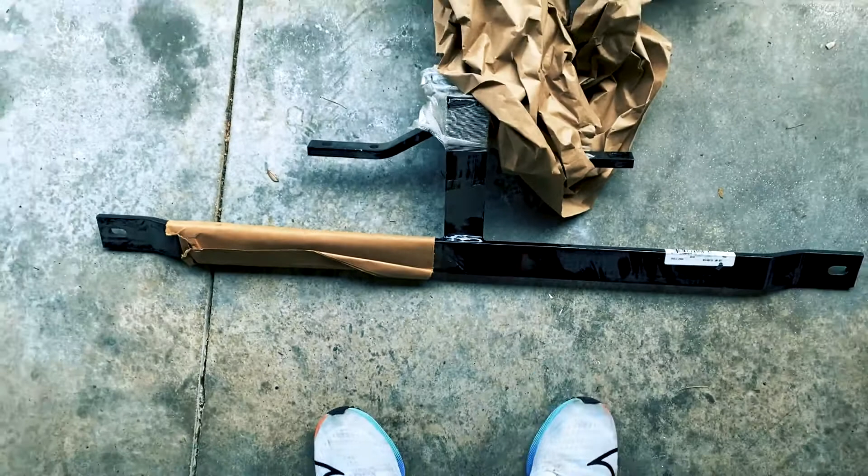I've got the trailer hitch box open, and I'm just pulling this out for the first time. Here's our E-Trailer.com box, and first piece I see looks pretty simple. It's a little dirty, so I may wipe it down before I put it on. Not that it's really gonna matter, it'll be under the car. So what I'm gonna do is just see if I can cut off this cardboard and plastic that's on there.

Is there anything else in this box? I was hoping maybe some instructions. No instructions. Well, we're gonna figure it out.

So this little bundle on the end was not just to protect it, it's also holding all the hardware that's gonna go on there as well. And so that's good news. Got all the bolts and everything, washers, I can see them in there. All right, in this little bundle.

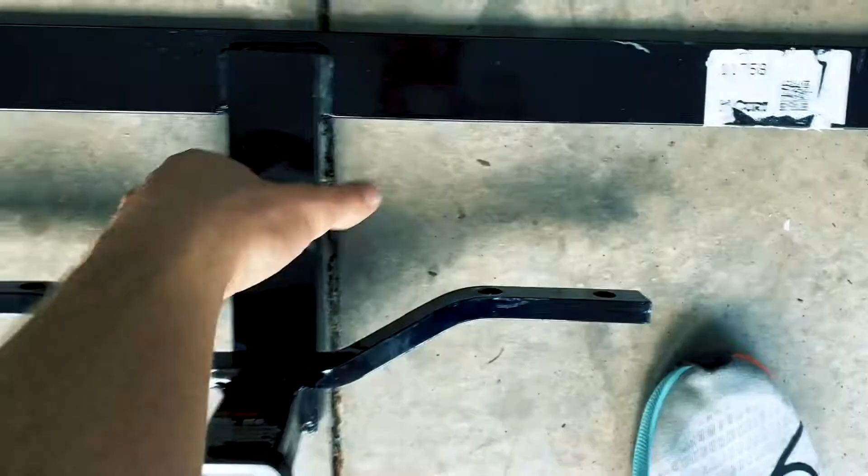I've got our hitch wiped down just to get some of the dust off of it. You can see it's like Curt. I'm not sure who they are, but these are the capacities of it. Now all I'm holding at any given point on this thing is gonna be 2 mountain bikes, so I really didn't need much in terms of capacity, just enough to hold a bike rack and 2 bikes.

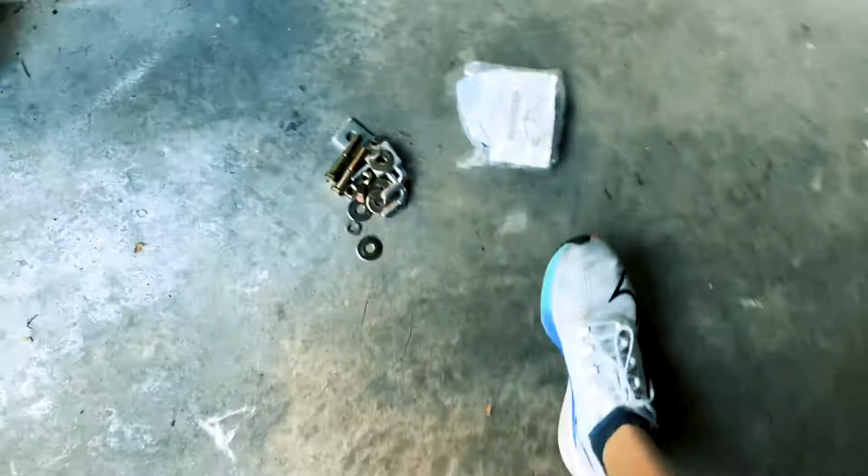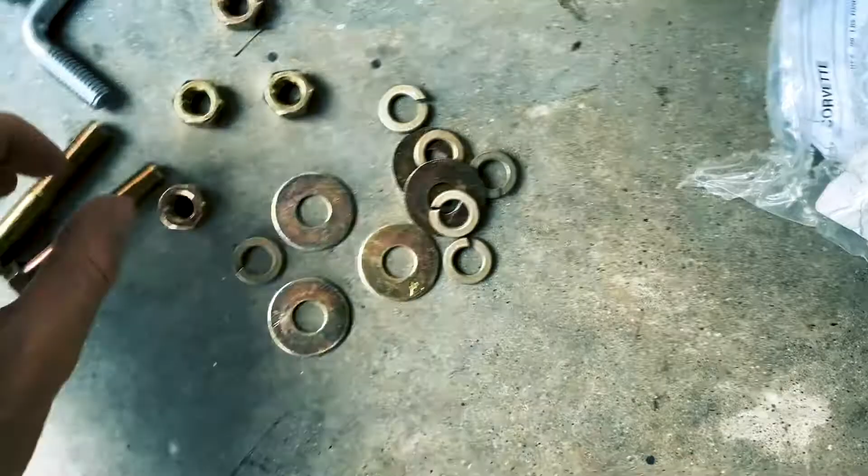When I open that little bundle up, here are all the parts I got. I've got a couple of big squares, or spacers or washers. It's like some kind of U-bolts, 2 big bolts, and various other washers and lock washers, as well as, ooh, it's like a little set of instructions. Awesome. So I'm gonna take a look at those and see how this install is supposed to go.

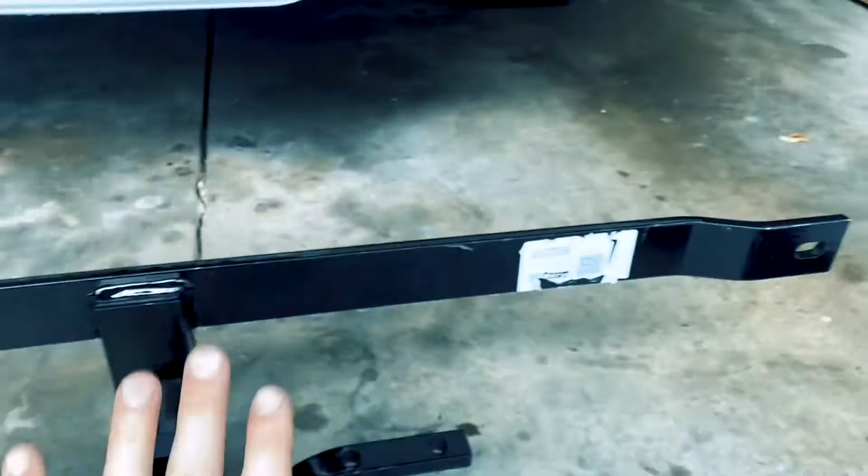So here's how this thing's actually gonna sit on the car, right? It'll be upright. These 2 at the ends holes are gonna mount underneath the car to hold it in place, and then I'm actually gonna have to come up from underneath in these 4 positions and drill using this as a template into the frame of the car to make holes that'll actually bolt it more securely to the car.

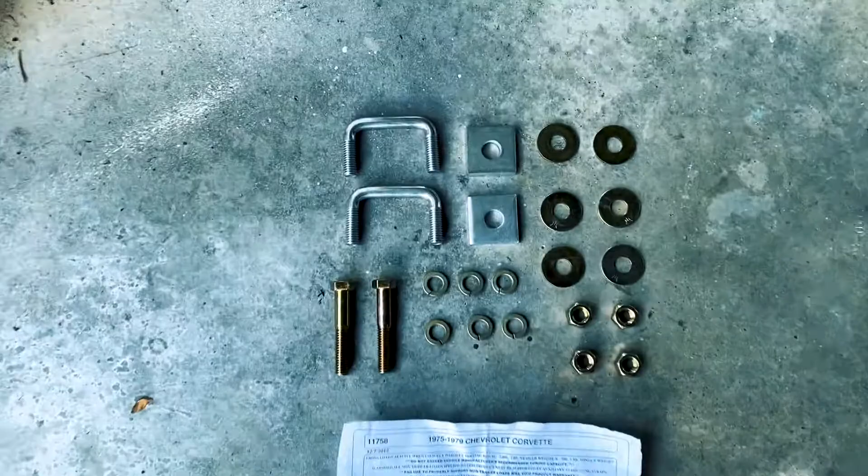So here's what we've got between our instructions and our materials. We've got these 2 U-bolts, as well as these 2 other bolts. These are the ones that are gonna go at the end to hold it in place while I'm working on it. These are just our flat spacers, regular washers, lock washers, and these 4 nuts.

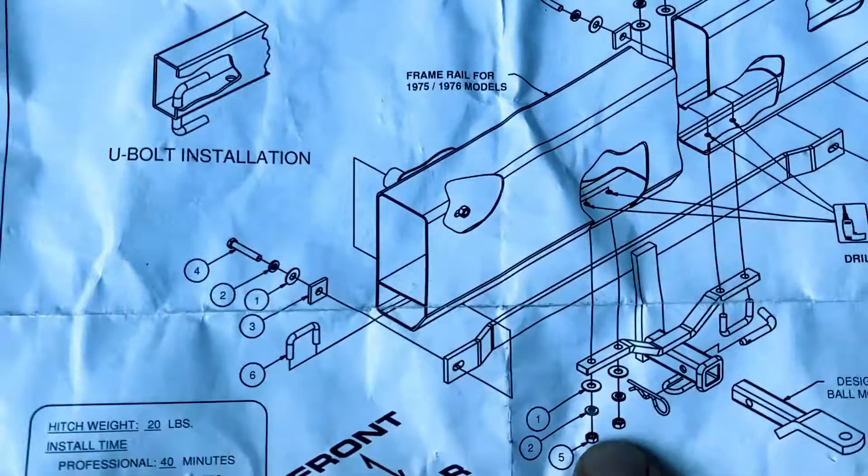So here's what the installation guide says. It's got this little picture, and you can see it's sitting upright. It's actually this whole unit sitting upright, just like I had it on the ground. And this first step says remove the 2 lower inside bolts of the bumper. I haven't seen where those are yet. I haven't actually gotten under the car today.

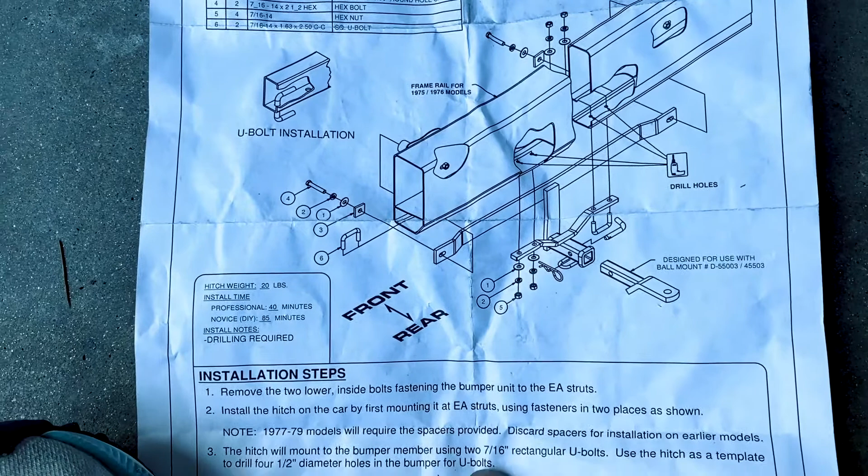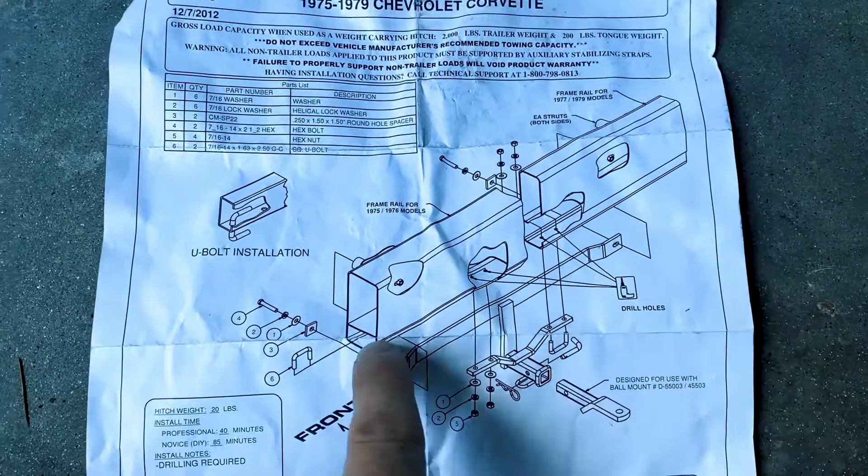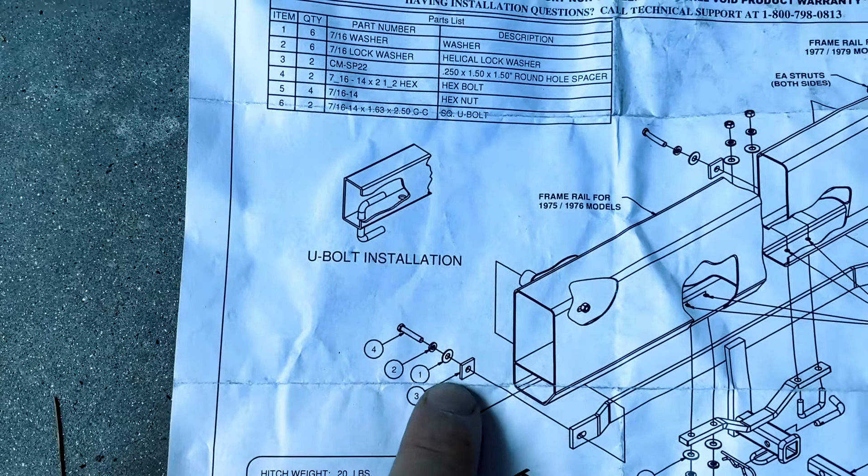Install the hitch in the car by first mounting at EA struts, using the fasteners in 2 places shown. So I think what they're talking about here is that this side and this side, I'm gonna basically hold up and in combination send one of these bolts right there with a lock washer, then a regular washer, then one of those spacers, and I guess use that somehow to mount it using this U-bolt. I'm not really sure what I'm doing here yet. I'm gonna have to figure it out a little bit.

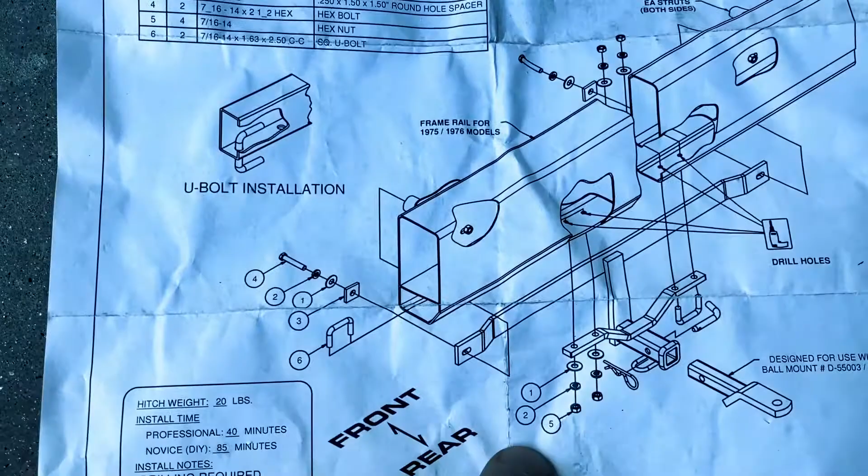There's a note down here that says for 75 and 76 models will require blind installation of U-bolts, see diagram.

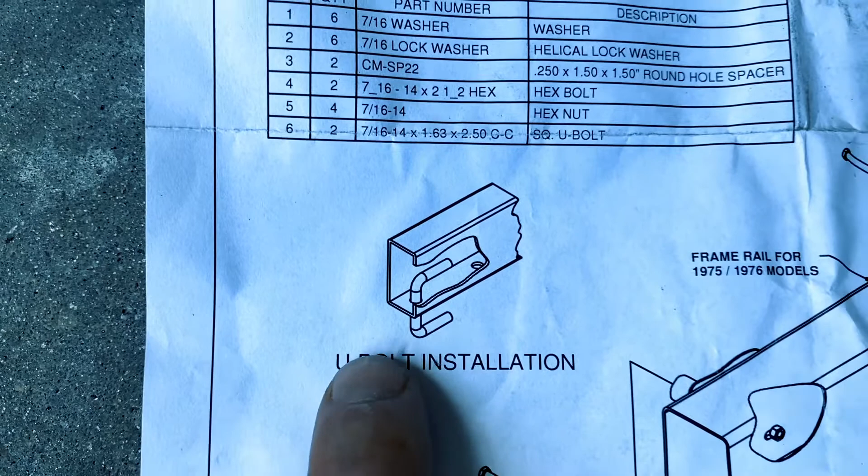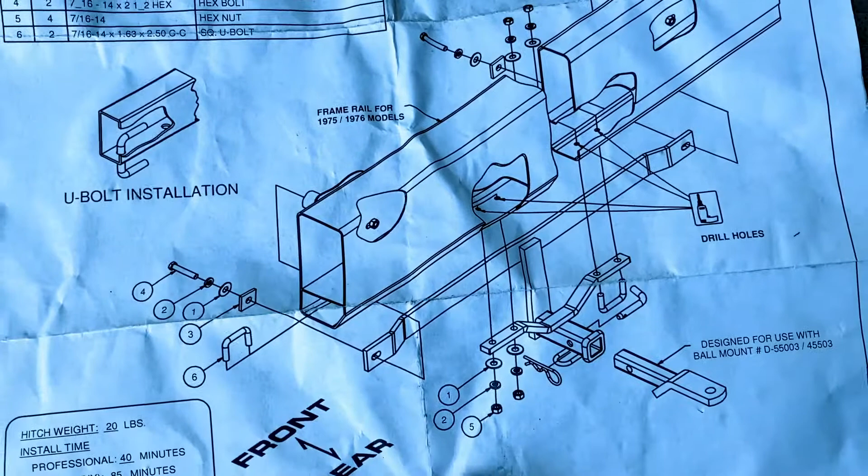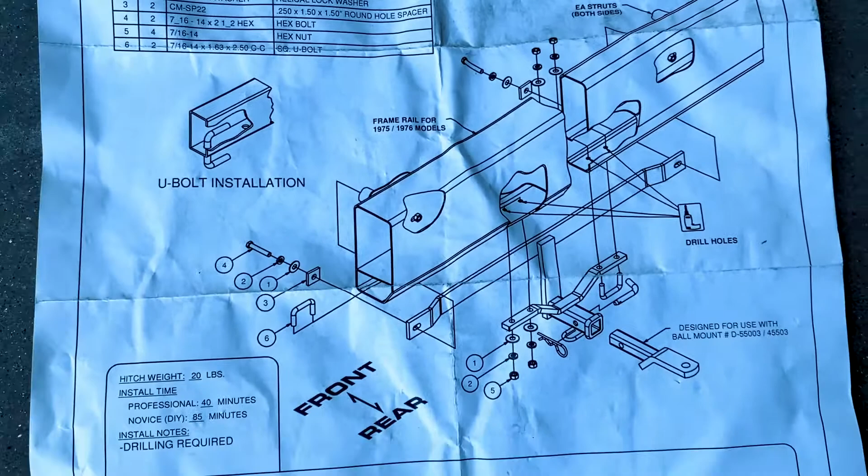So here's this diagram, and that applies to me since this is a 76. I guess I'm gonna feed it through and try to do it by feel while it's inside the frame. And then here's where I'll actually be drilling holes, using this thing while it's held in place as a template - these 2 holes, 2 on each side. Then using this combination of fasteners provided, I guess I'm gonna be bolting it in.

Not totally as straightforward as I thought, and I wasn't aware I was gonna have to drill in, but luckily I've got a drill and a 1/2-inch drill bit that I think should do the job, and some safety goggles since I'll be laying underneath metal that I'm drilling into.

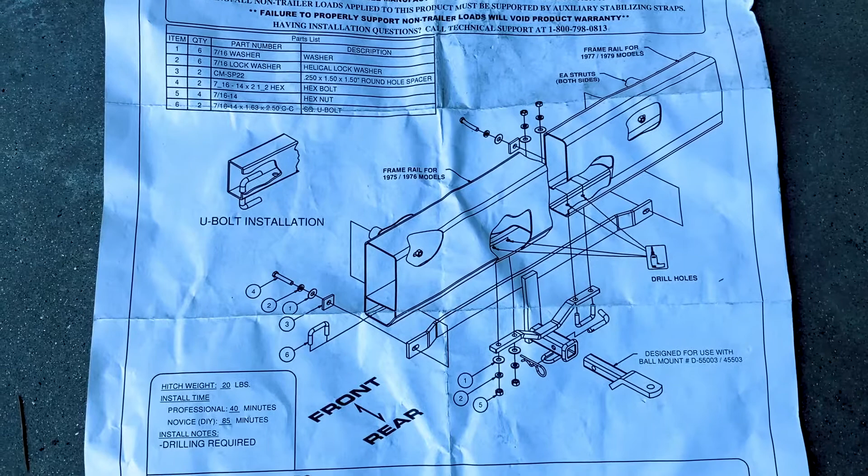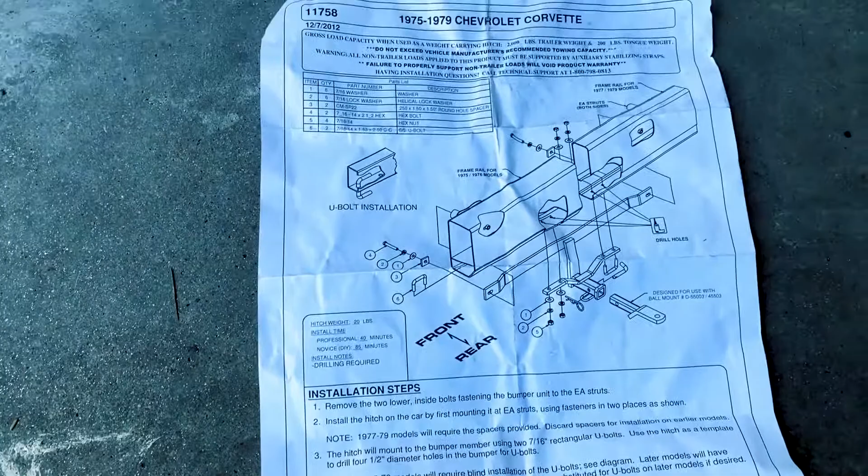So I'm gonna get myself under the car and see what everything looks like down there, see if I can make a little more sense of this. That's it for instructions - just those 4 steps in that 1 diagram. So we'll see how this goes.

Time to get under the car. So what I've done is chocked off the front wheels to be safe. Of course, the car's in park, the e-brake is on. I've also opened up both doors just so that they're not latched, and pulled the hood latch to release that as well. It's just something I've read - when you're lifting the C3s, you're supposed to have the doors and hood unlatched. I think it gives it a little room to flex.

Under the load, not totally sure why, but it sounds like it's a little safer that way. So what I'm gonna do now is, now the wheels are chocked and the car's parked, throw my floor jack underneath it, find a good spot on the frame in the rear, lift up the rear, throw some jack stands under it, give it a good shake to make sure it's safe, and then get myself underneath to look at where this trailer hitch is actually gonna go.

Let's get after it. Look at this monster truck looking Corvette way up in the air. That's so funny, but I went ahead and got it jacked up.

So I've got a 4-ton jack stand on each side, sitting here holding it. We've got the wheels chocked in the front - may as well kick those in, make sure they're right where I want them. And what I'm gonna do now is give it a good hard shove, because if it can't take that...

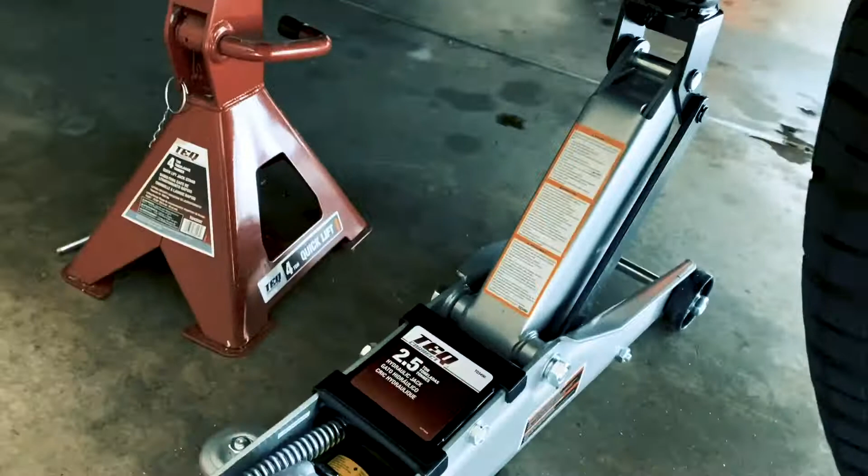...without budging, good - I don't want to be underneath it. So it feels real solid. I've got a jack stand on this side, and also, just for double safety, I put the jack itself just barely touching. The jack's not the thing supporting the weight - I would never go under a car that's only supported by a jack, because those do give out. But the jack stand, I trust. The jack's there just for a little bit of insurance.

That was more of a process than it probably should have been, but I was able to remove the first 2 bolts I need to take out. It's kind of funny seeing how tapered the ends are. I found on eTrailer's website they had a video of this whole installation process, which is amazing. I feel like I have an approach now and know what I need to do.

So what I did is I got under, and basically next to this tailpipe underneath here - there it is - where you're seeing that 1 bolt, there were 2. So I removed the lower of each. What I'm gonna do is basically slide that top wide part in above the exhaust on each side. You sort of have to go up one way, then up the other, then let it rest down, and it should hold itself more or less into place, which is gonna allow me to drive these in.

With a stack of hardware - basically I'm gonna go the locking washer on first, followed by flat washer, followed by a spacer. This is the new hardware that's gonna replace this rusty old bolt that I took out before. These actually weren't that rusted other than the exposed ends.

This is gonna bolt into that same spot in the chassis and hold that thing up in place. Once it's held in place, I'm actually gonna take my jack and press it just slightly up to where I can use those vertical holes as a template to drill my holes. This looks like it's gonna be more straightforward than I thought.

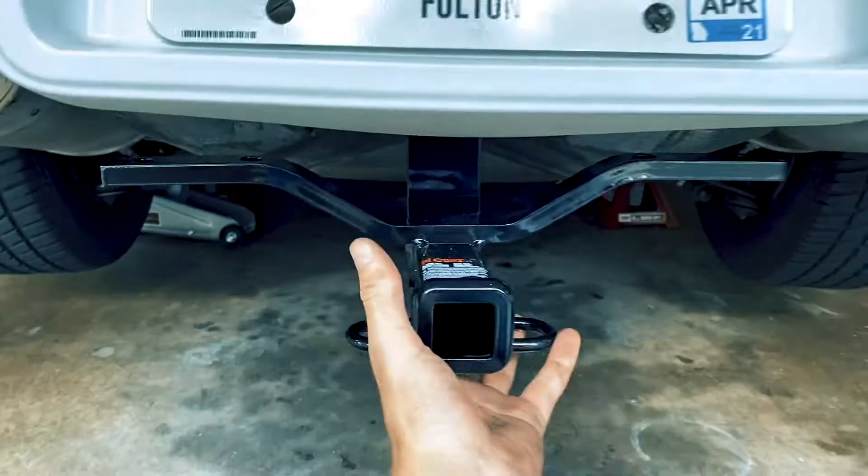I was getting a little intimidated at first, but that video was so helpful. So here we go. I slid this up underneath, and it's basically hanging on these 2 tailpipes underneath there, but you can see about where it's gonna go.

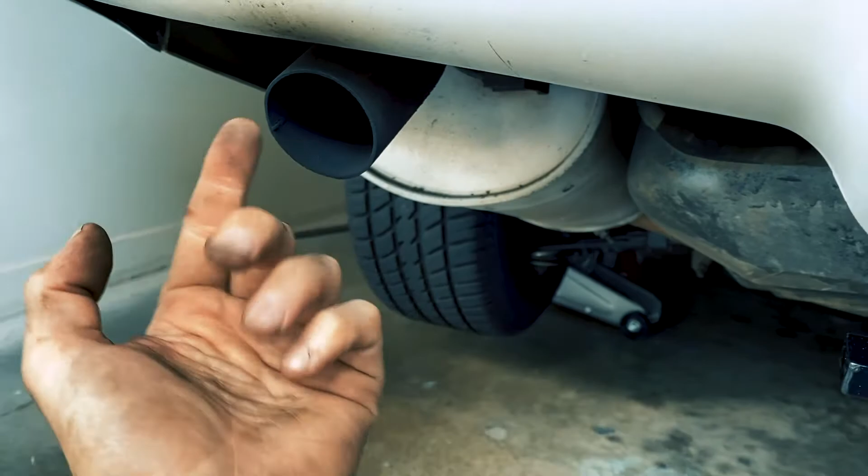This will press up until it's flush with the frame, but this is where the tongue receiver will stick out. It's so nice that this holds itself into place on one side while I'm doing the other, because I've done a trailer hitch install before where with one person it was an absolute nightmare. So I'll get under there, put the new hardware in where the old bolt was on this side first, then swing over here, put the other hardware in, and once they're both installed, I'll tighten it down to spec.

This thing is feeling solid, and both those bolts went in fairly easily. What I did is just finger tightened one a little bit, finger tightened the other a little bit till they're balanced, and got them both as far in as I could, just going finger tight before I put the wrench in, because I wanted to keep it even. I didn't want to fasten one down and have it cockeyed.

I went ahead and torqued it down, and already you can see it's pretty hidden away. I love that it was designed just for this car. It feels fairly solid, but I've got a lot more hardware sitting around, which means I'm not done yet. So I'm gonna continue the install process.

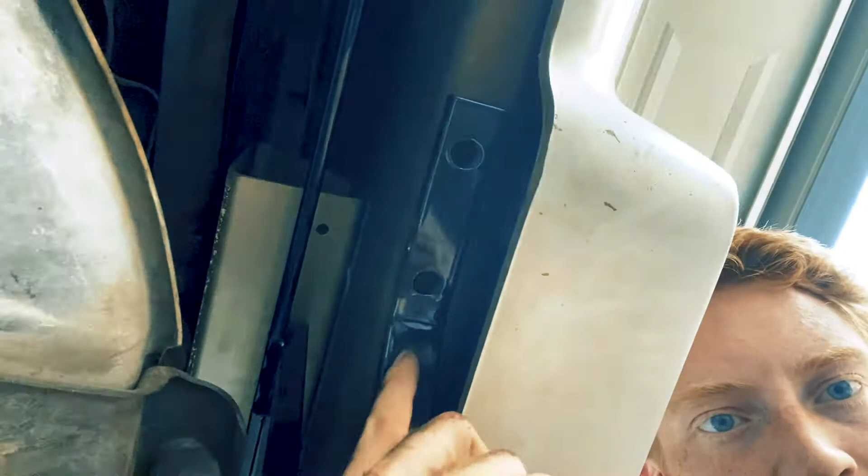Now onto the part where underneath here there's actually 2 holes on each side, so 4 total, and they're already lined up pretty well with the frame. I'm gonna use my floor jack to just hold this up in place. Not that it feels like it has any give, but we'll try it. Then drill a hole, a slightly undersized hole, punch a hole in each of those, and then somehow I'm gonna have to get a U-bolt in there and line it up.

That's that blind U-bolt installation step that they mentioned. Hopefully that goes smooth. I imagine that's gonna be a little bit of a hassle, but this is going well so far.

It is an embarrassing number of hours later, but this thing is completely finished. It seemed pretty straightforward in terms of drill those 2 holes, drop the U-bolts in. First 2 holes with the new hardware replacement, one over by this tailpipe, one over by this tailpipe. That one's super easy.

That was really nice the way that the trailer hitch receiver sort of held itself into place while I was working. That was great. It mounted right up to where I could use the pre-drilled holes as sort of a guide for where to drill my 2 holes into the frame of the car.

So I drilled my first 2, and then this is where the issues started. Basically I drilled my first 2 holes and then noticed another little note in the instructions I had missed on my first couple of reads. That was to ignore these little spacers if you had a 76, or earlier than the 77 Vette.

This is a 76, so of course I didn't need these. I had the spacer in place when I drilled the holes, which meant my holes were going to be off to the side by the thickness of this spacer. That part ended up not being a huge deal. I just pulled all the hardware out on one side at a time, removed the spacer, put it back in, and my holes still pretty much lined up. They were a little bit oversized anyway, so that was totally fine.

But everything has been torqued down and it feels really solid. I mean, I can yank on this thing, it's not going anywhere. It feels like it's part of the frame of the car at this point, which is awesome.

So I'm gonna take it off jacks and take a much needed shower, but that was a lot of fun. All that work, totally worth it.

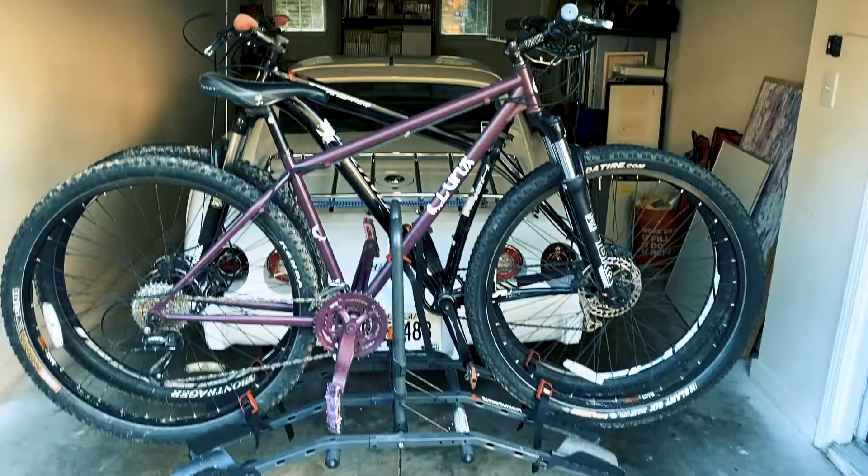We got both mountain bikes loaded up on this thing. Hilarious to see a classic Corvette with 2 mountain bikes and a bike rack on the back, but this is the reason I did it.

I just rebuilt this, my old high school mountain bike. I totally tore it down, sanded it down to the frame, and gave it a fresh paint job. We named it Luna. Came up with this little icon here with a rock climber and mountains, and had new cabling done at the shop. I rebuilt everything else, and it's got fresh brake lines, fresh shifting lines. It's dialed in and riding better than the day I bought it.

But what a fun little adventure car this has turned out to be. It's a little bit ridiculous, but it's a lot of fun. There it is, right there. More fun.